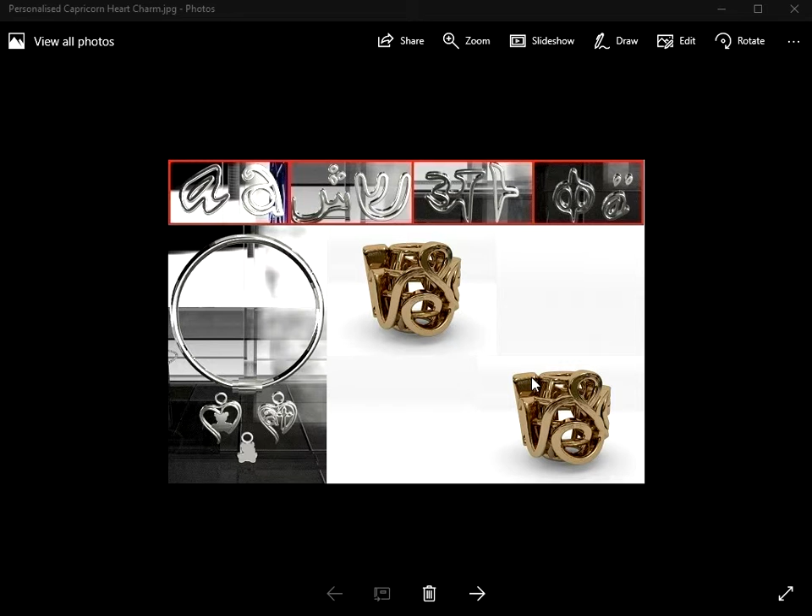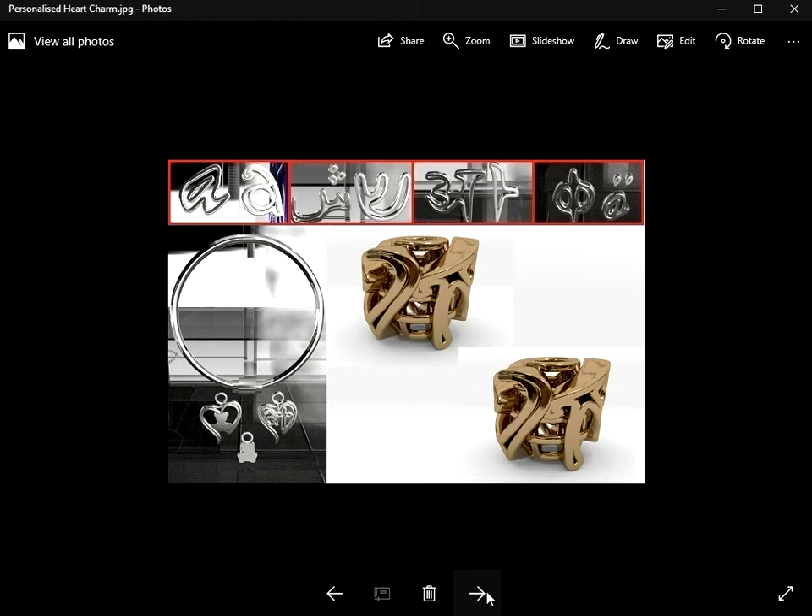Now there's lots of other objects you could put on. You could put on this Christian cross, for example, a Greek pattern. You could just put hearts on it, or this Mayan symbol. Basically you can put anything onto the outside of your charm in a similar way as to what I'm going to show you.

So if we go to Fluid Designer for 3D printing, I'm going to use this 4mm charm object, which has been pre-built for you.

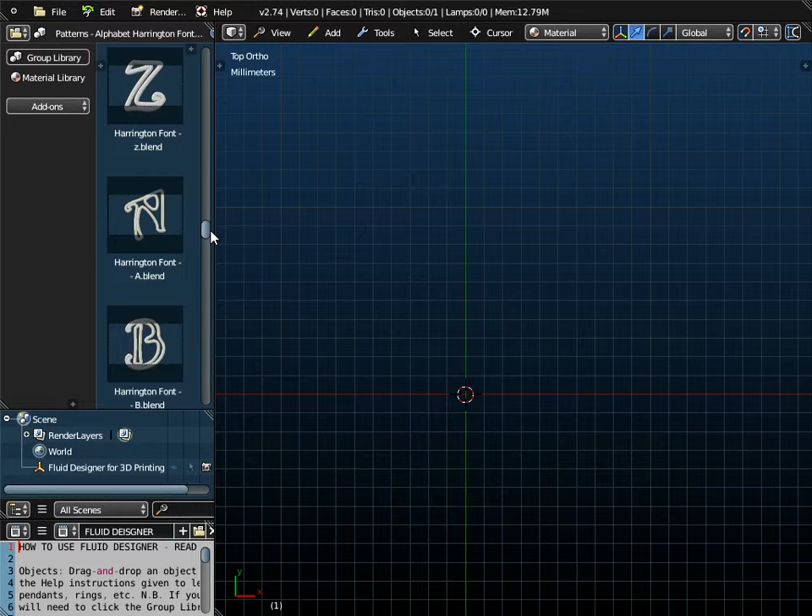And to that, I'm actually going to add... not Blackadder, sorry. I'm going to add a Harrington font, this letter A, onto the outside of the charm.

I'm also going to add a heart pattern. So if I go to hearts, I could add any one of these hearts to the outside of the charm, but I'm going to add this one here, 005.

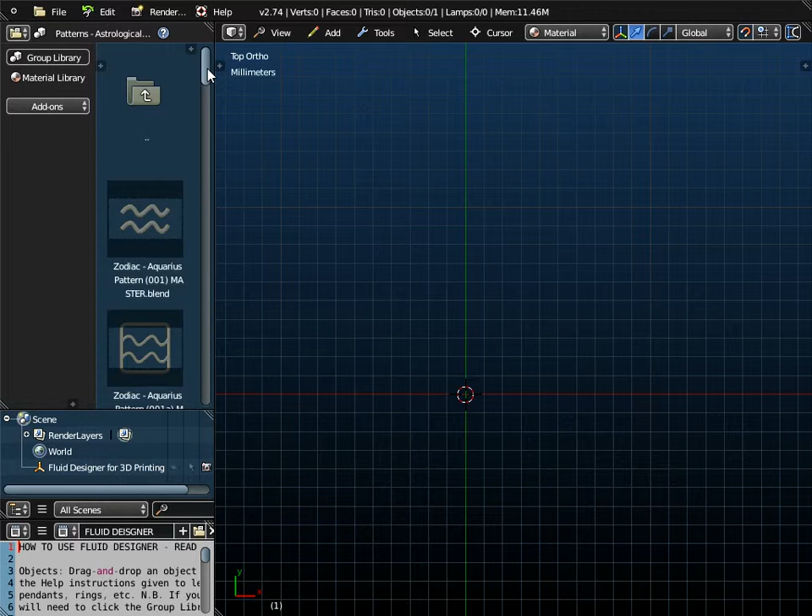And I'm also going to, in this case, add an astrological zodiac symbol, and I'm going to add the Capricorn one. So those are the objects I'm going to combine to place on my charm.

So if I go back to the charms folder, I'm going to use this 4mm charm here. If I just drag and drop that onto the workspace, and I'll switch on Screencast Keys, so any key presses I make should be displayed down here.

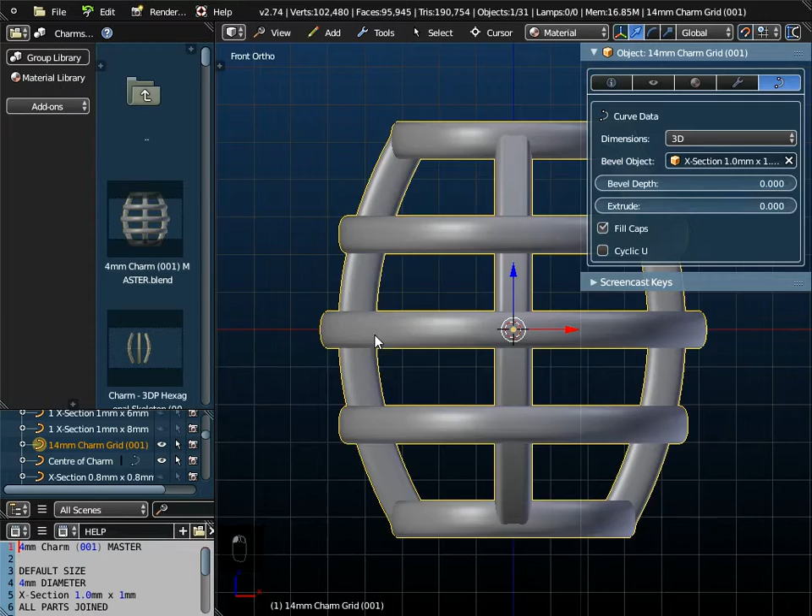Now this pre-built object, if I just remove the bevel object here, it's a curve or a combination of curves which have been joined together for you, and you can apply thickness to this.

So let's see, the default cross section was 1 by 1, a square sort of cross section, so that's 1mm by 1mm there. And it's got a 4mm hole at the top for you.

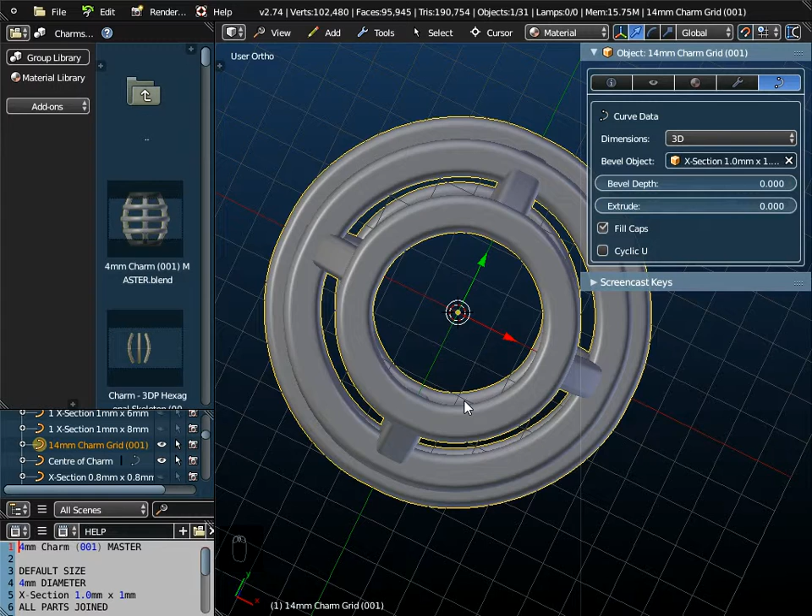And you can change the cross section to rounded. So I'm going to change it to a cross section diameter of 1. That gives it a rounded cross section of 1mm.

So let's say this is a parametric smart object. If you go view from the front, so that's what it's going to look like, and we can see the length of this. It's only a centimetre long.

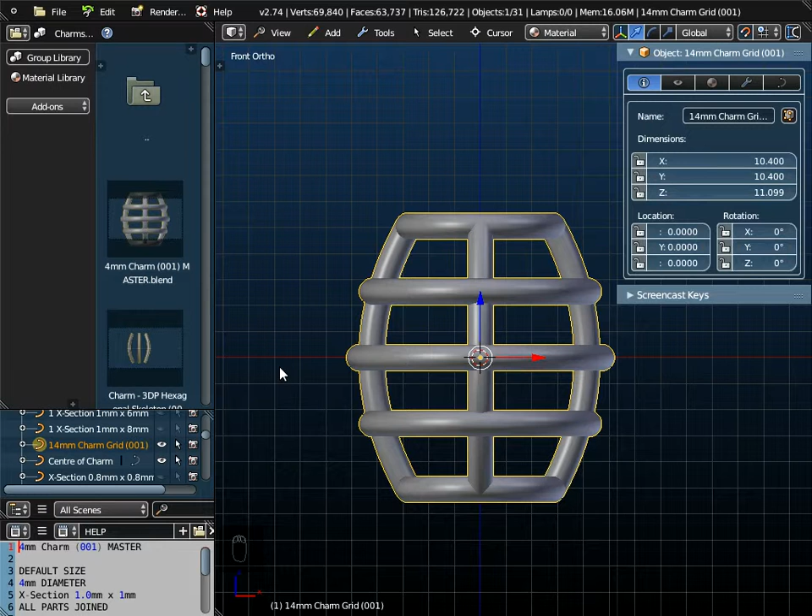But something that we are going to do is to place objects around the outside of this. Now, in order to place objects around the outside, we need somewhere to locate them. So there is this object over here, the centre of the charm. That's an important object to use here.

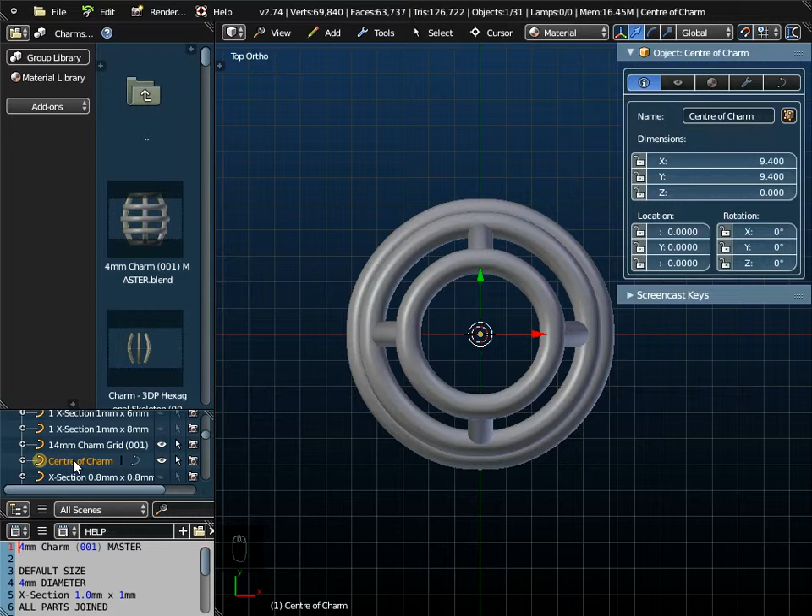So if I go to view and top view, now you can't see what centre of charm is at the moment, but if I press the tab key, essentially that is the outline of a circle. I know it looks like a square, but that's just because we're in edit mode.

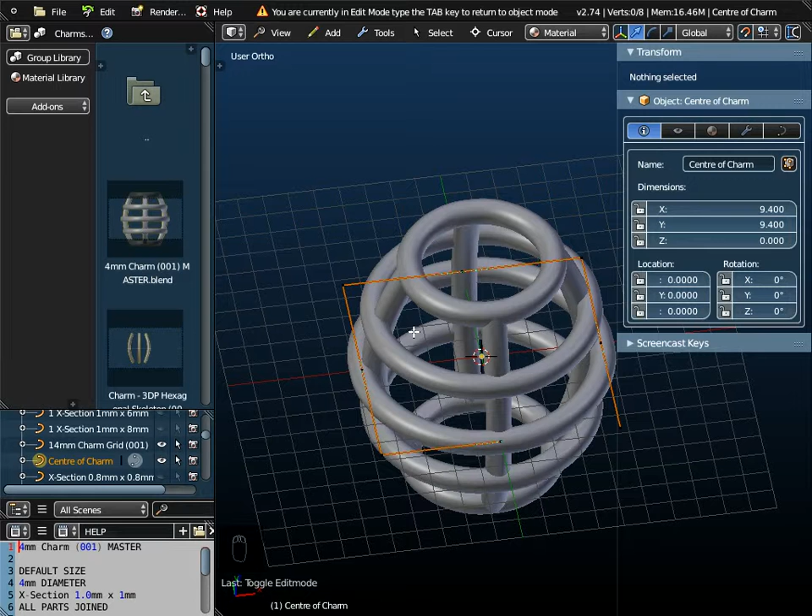That object is in fact a NURB circle, and we're going to wrap our Capricorn pattern and heart pattern and Harrington font around this object. As you can see, it's just located in the center of the charm outer section there, so there'll be some overlap. So we're going to use that object.

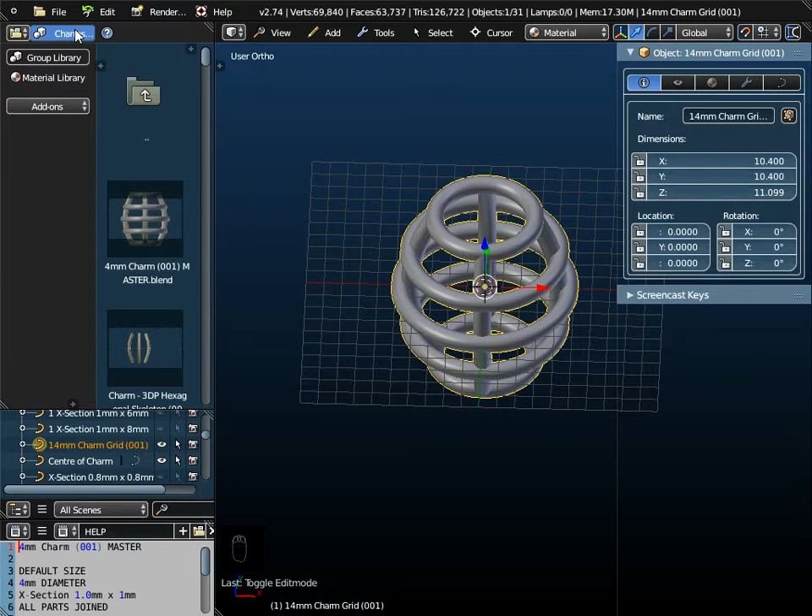Let's start adding objects to this now. The first thing I'm going to do is add a heart, I think. So if I go back to the heart folder, I'm going to add this heart 005.

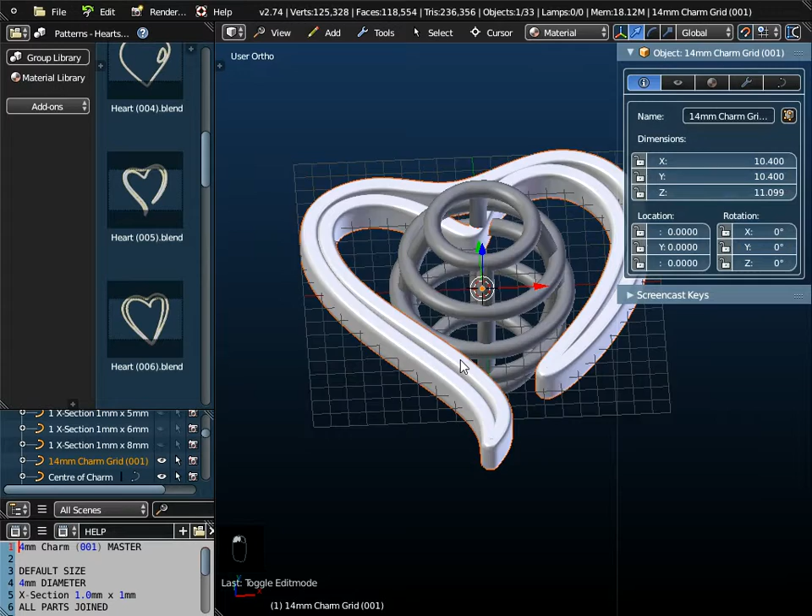And the way we do it is we go to File and Append. Just go up through the menu system until you get to the Groups folder, and look for the hearts pattern folder, and I want heart 005, and I append that from the library. Now make sure you click on it to select it.

Now clearly that's not in the right orientation at the moment, so if I press R on the keyboard, X on the keyboard to limit the rotation to the X axis, and if I type 90 degrees, that will rotate it to the right orientation.

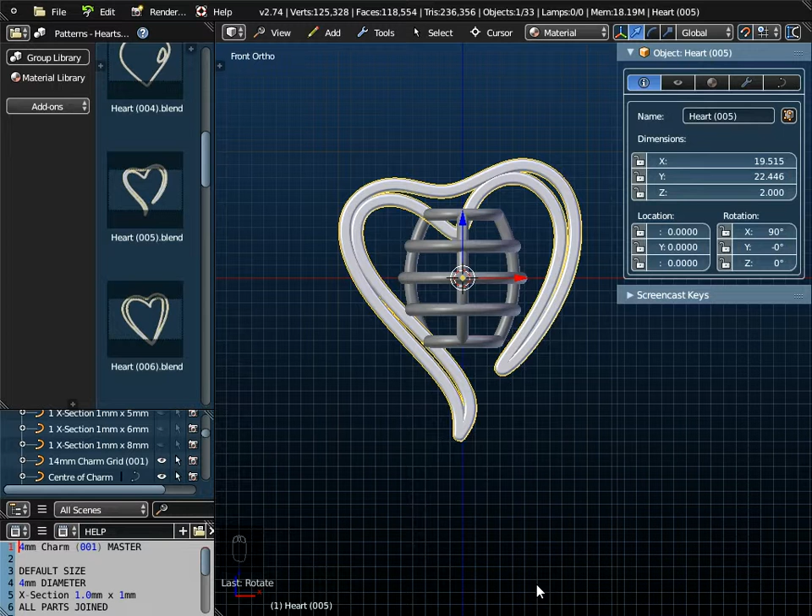And if I view that from the front now, I need to scale this down, so it's S on the keyboard for scale, and I'll leave it at that size. Now whenever you're scaling in Blender, you must always immediately do Control A and apply the scale, and notice the thickness is reapplied as you do that.

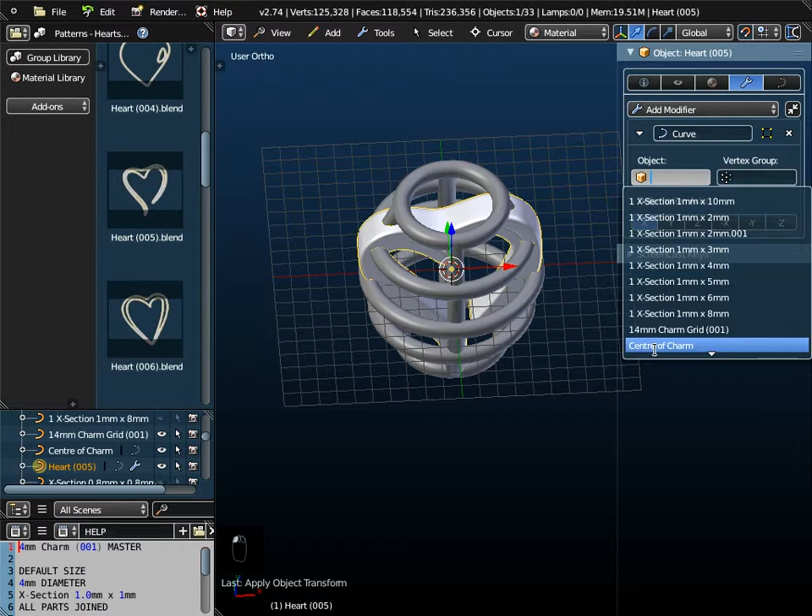Now what we want to do is attach this or locate it on the outside of this charm, and we do that using a modifier, curving this around the center of charm object. So we add a curve modifier, set the object to center of charm, and that will locate the heart on the outside of it, but overlapping, because we need a solid object.

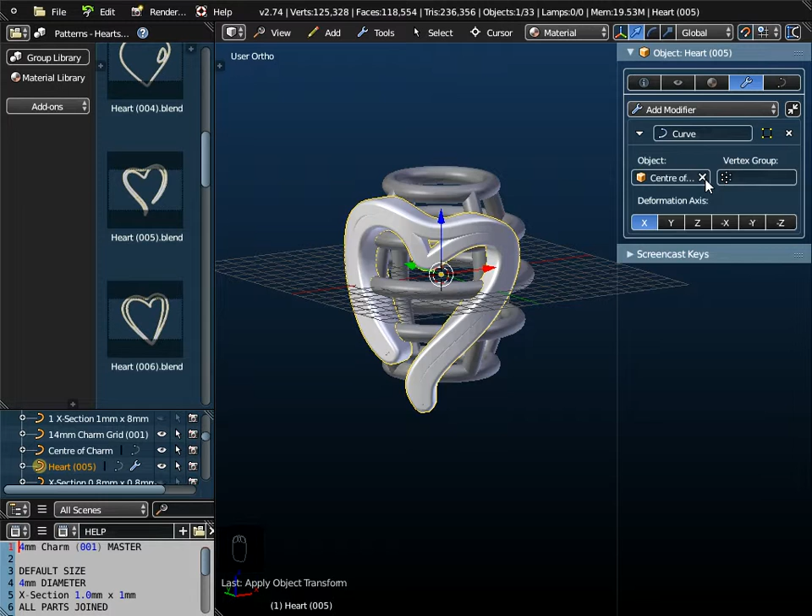Now, one thing that's just happened, if I remove that, is it's actually flipped the heart the wrong way round compared to the original. That's not important for the heart shape, but it will be important for the other objects we're going to add. So I'll leave that heart as it is, and now I'm going to append a Harrington font.

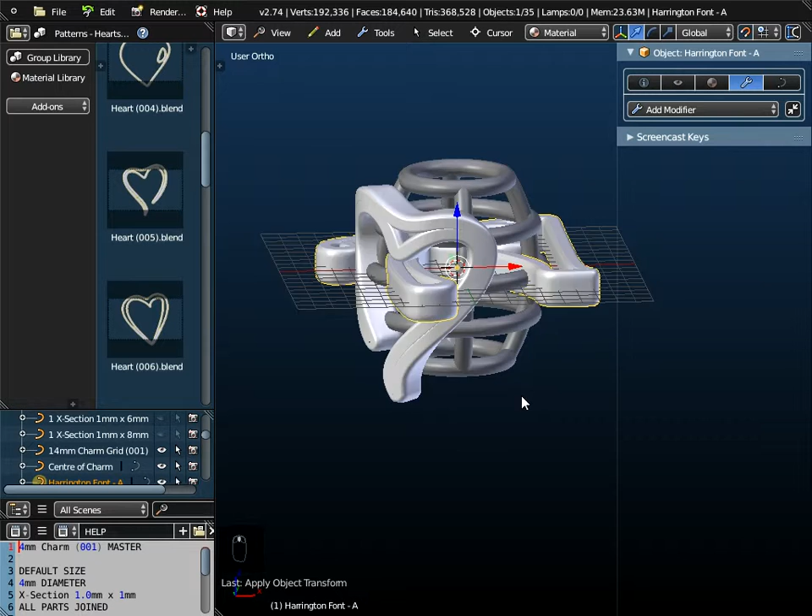Go up through the menu system, go to Alphabets, Harrington font. I want capital letter A, the object, so I just append that from the library. Again, this is the wrong orientation, so we do R on the keyboard, X on the keyboard, and 90 degrees, that will rotate it.

If we go to view and front, and I do S for scale, I can scale this down. Always remember to do Control A and apply the scale, otherwise you won't know what the thickness is.

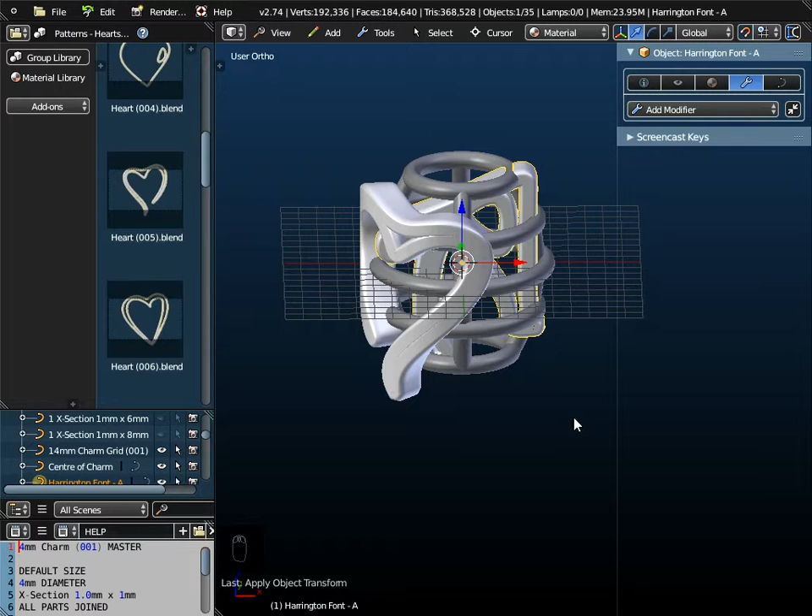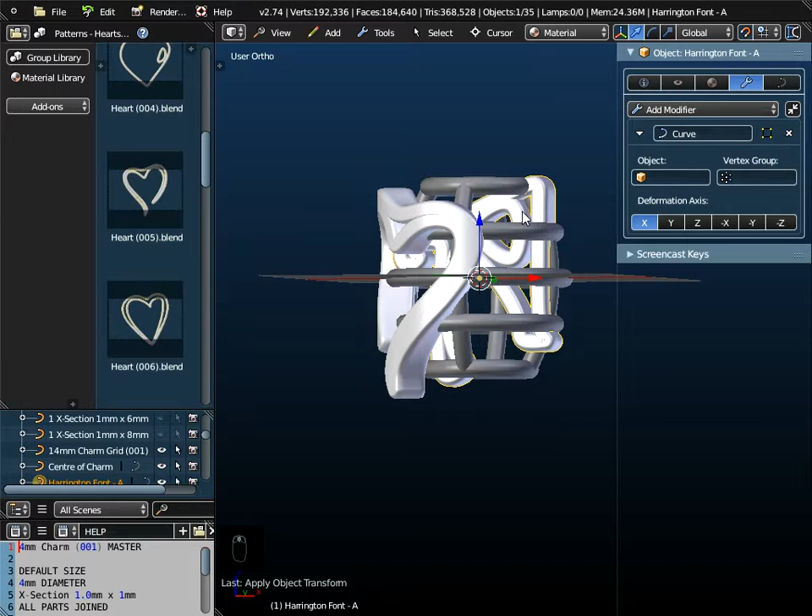Now if I simply use a curve modifier again and set it to center of charm, one of the things it does is flip my letter A the wrong way round from what it was originally. If you look there, you can see the O in the A is on the right hand side. If I do center of charm, it's flipped it onto the left hand side.

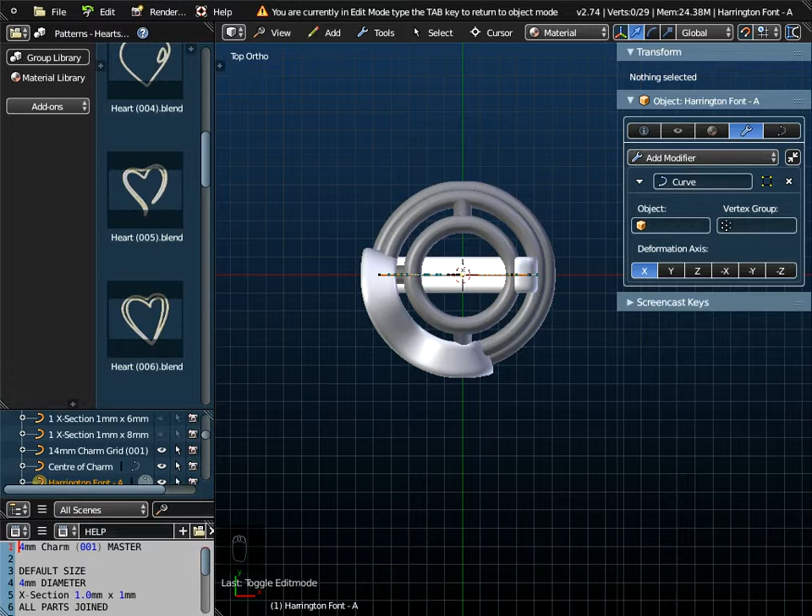Now you might be happy with that with the A, but you wouldn't want that with other letters, so how do we fix that? Well, if we go to view and top view, with the A highlighted, we go into edit mode, and we need to highlight all of this object, which we can do by pressing A on the keyboard. That will select all the control points.

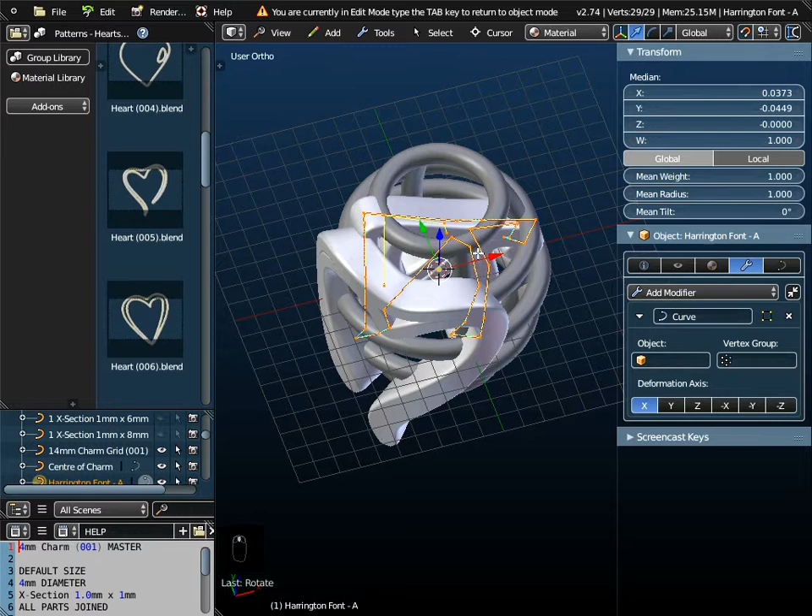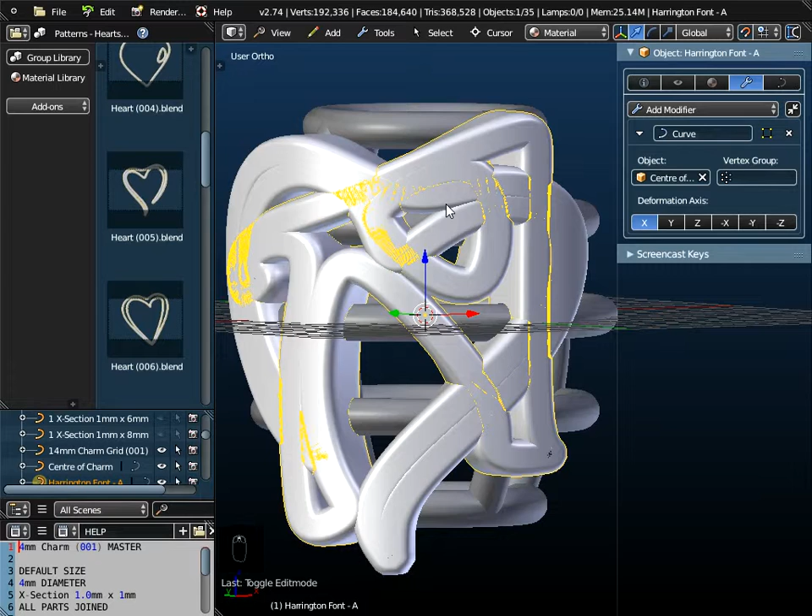What I want to do now - this is the Z axis coming upwards - if I go back to top view again and do rotate Z 180 degrees, I've just flipped that A around. If I show you over here, that's what I've done, flipped it completely around. And if I come out of edit mode now, go back to modifiers and set my curve modifier to center of the charm, you can see the A is now the same orientation as it was originally in the Harrington fonts folder.

So if you just go to Harrington fonts, here's the letter A. You can see that the O part of the A there is on the right, which is what we want. I'd say that's quite an important point to make for certain objects.

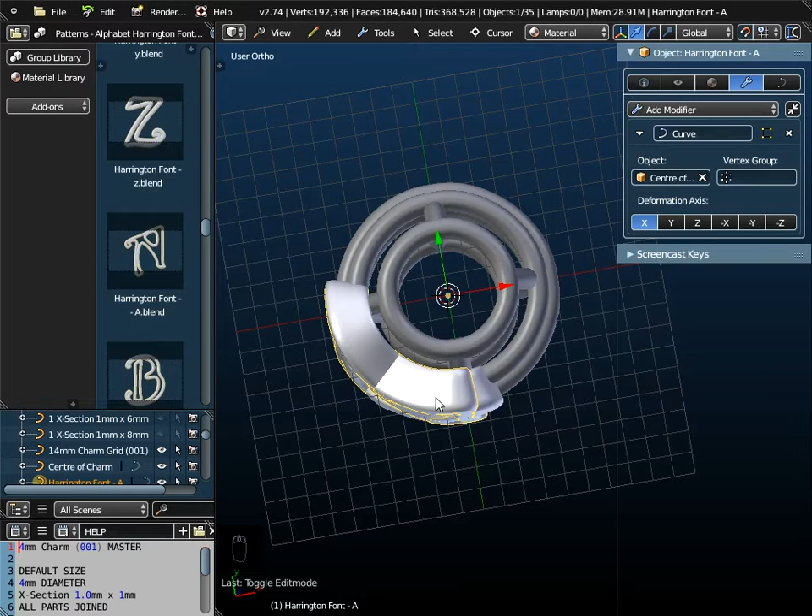Now, as you can see, it's right on top of the heart shape at the moment, so I need to move it around. The way I move it around is I go into edit mode, and I either need to move it to the right or the left. I suspect I've got to move it to the left, so I've just dragged the red arrow there, and you can see that's moved it away from the heart.

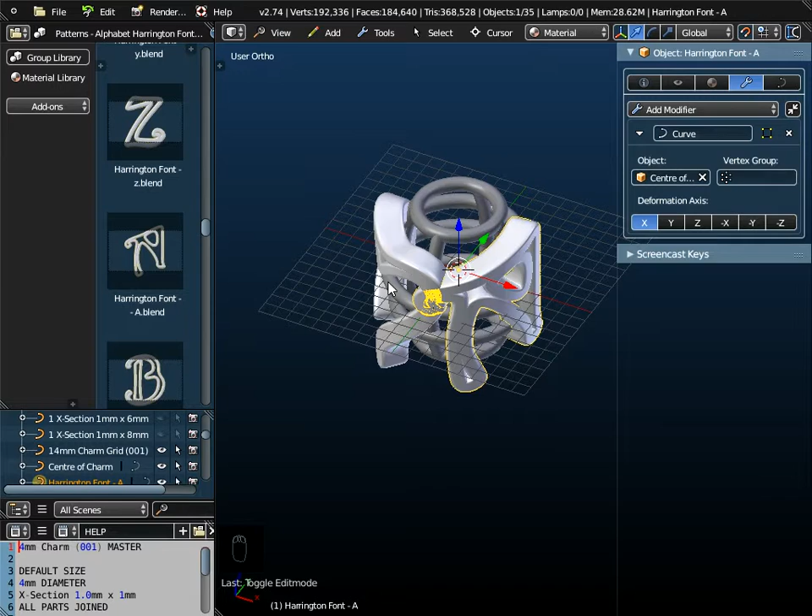Now I've got some overlap there, but I'm going to leave that at the moment - I might come back to that. It just depends how much space my final object, my Capricorn zodiac pattern, takes up. So the next thing I'm going to do is append that - I'll just show you where it is again.

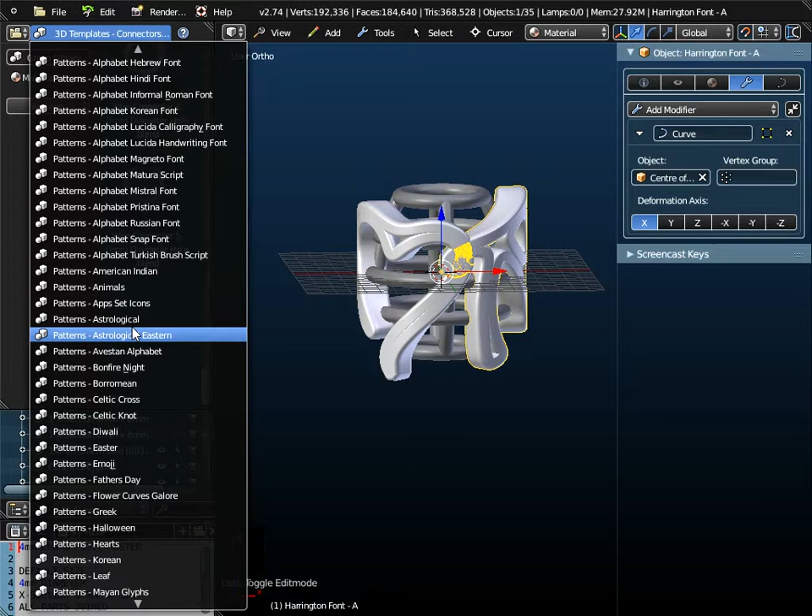So it's an astrological symbol, and we're going to append this Capricorn pattern. Now there are two of them, one with a box around it, one without. I'm going to append this one here, so it's Zodiac Capricorn pattern 001. So go to File and Append.

Just go up through the menu system until you get to the Groups folder. We're looking for astrological patterns. I want Capricorn pattern 001, not 001A. And I want the object, and I just append that from the library. So there's my Capricorn pattern.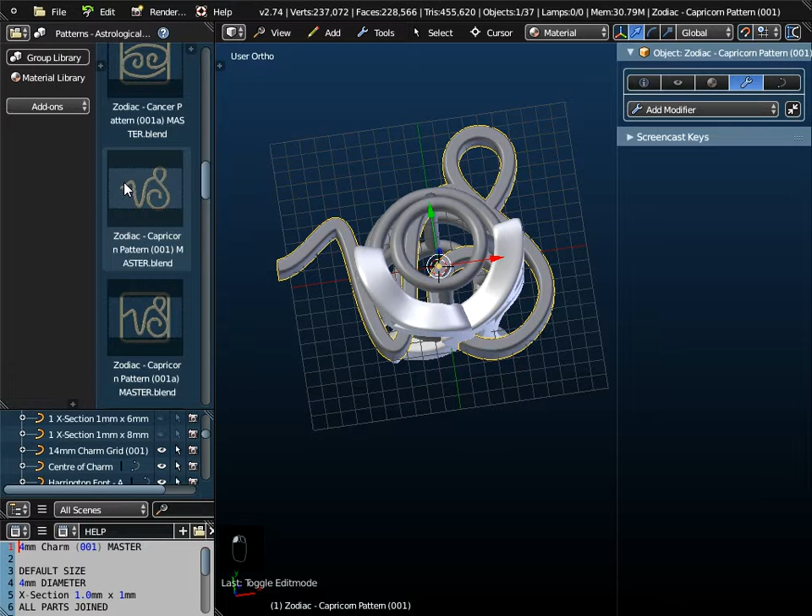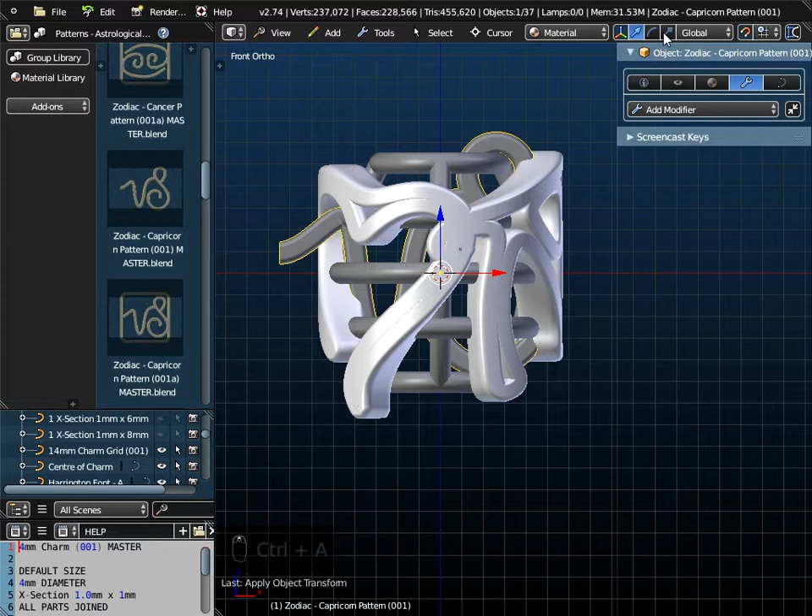Now the orientation of this is really important. So first of all, press R on the keyboard, X and 90 to orient it like that. Let's just go to view and front view again, and we scale it down, and remember to do Control A and apply the scale. If I switch off the snap, I can drag that down a little bit, and then switch the snap back on.

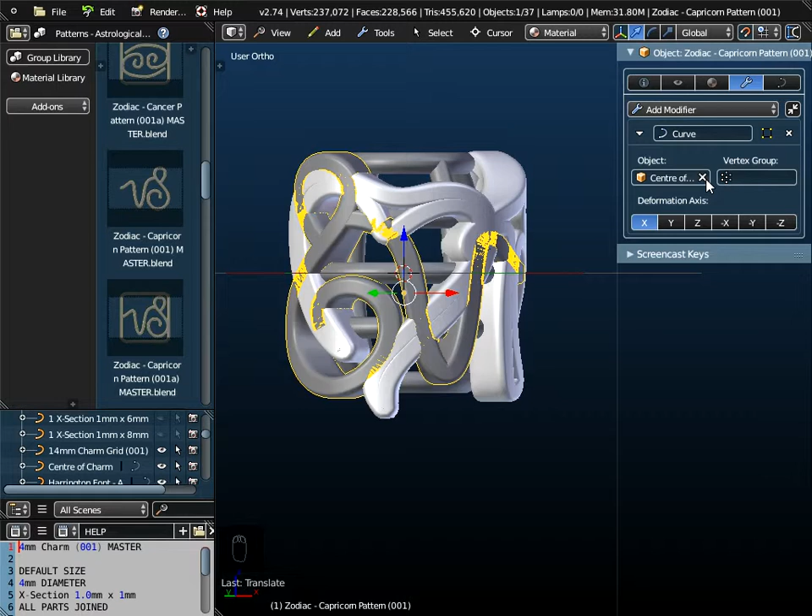Now remember that this is the orientation of the Capricorn pattern, so if I just go to Curve Modifier and wrap it around the center of the charm, this is now the wrong way round. The kind of V section should be on the left, but here it's on the right.

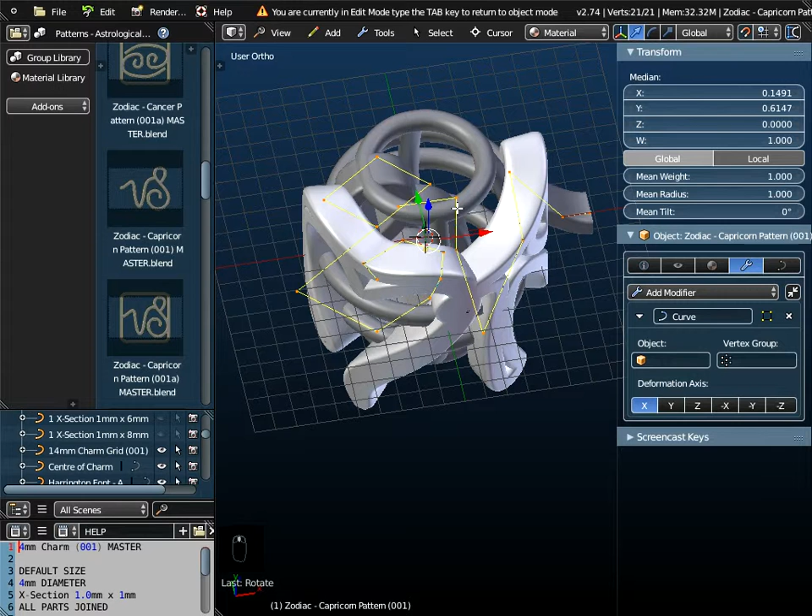So what you must always do when you use this curve modifier like this is go to top view, go into edit mode with the tab key, press A to highlight all the control points, and rotate about the Z axis, R Z 180, and that flips it around the other way. Come out of edit mode, and then you can set the curve object to the center of the charm, and you can see the orientation is now correct.

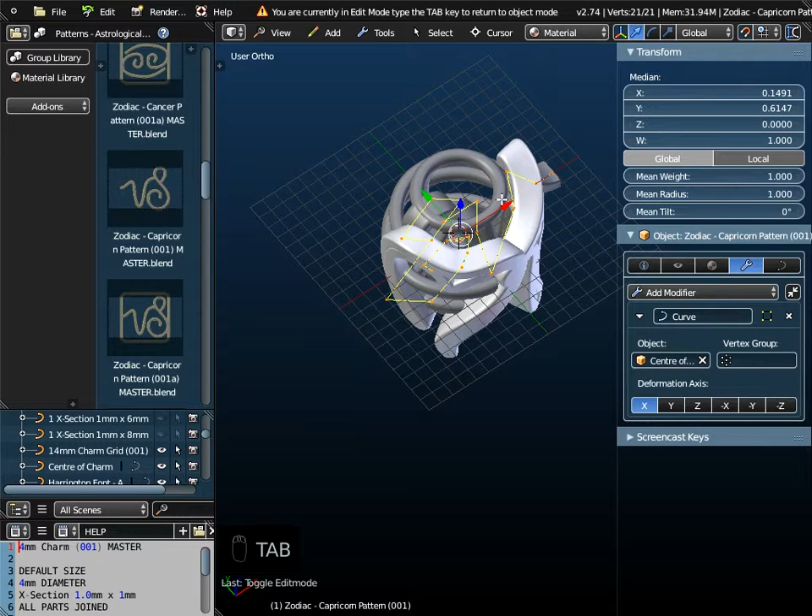So that's an important point. Now we want to move this around here, so we go into edit mode again, and I suspect I move this one to the right. If you're not sure which way, you just play around moving it to the left and the right, and you can see I've positioned it there.

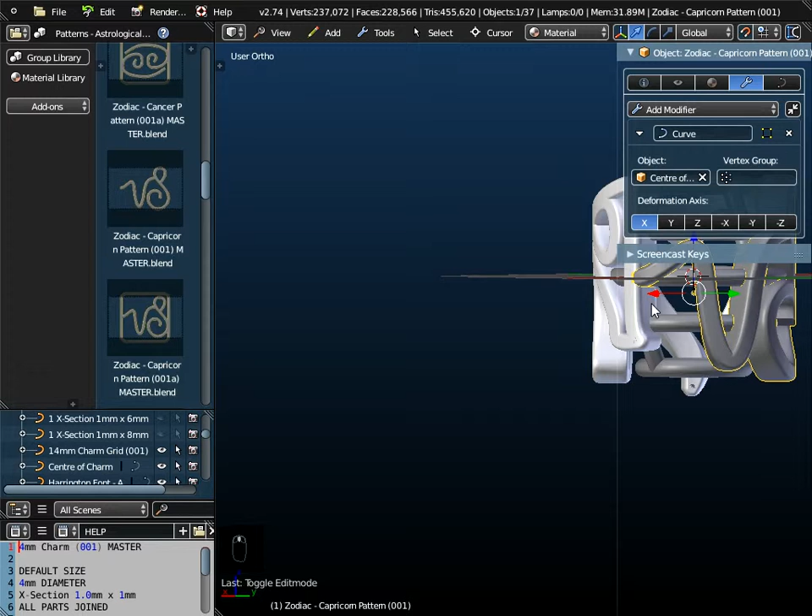Now I've probably moved that a little bit too far, so I'll pull it back a little bit. Okay, so I've got a gap there, but that's all right, I'll leave that gap. I've got my A there overlapping, yeah, that's okay. Now you can obviously adjust these and size them and position them as you want, but I'm quite happy with that.

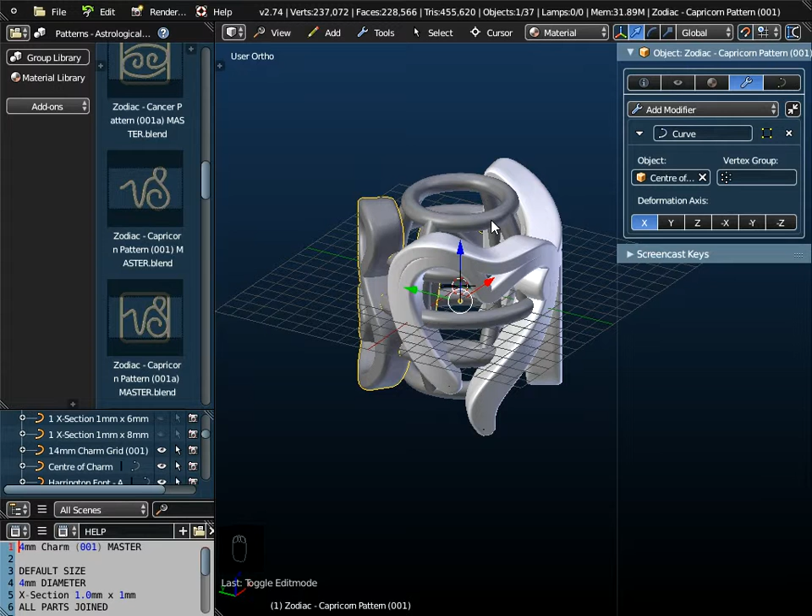Now, we can't simply join these objects together as curves, because if we do that, they will take on the properties of the last object we select. So if we highlight each of these three patterns first and join them together, that'll probably be okay, because they've all got the same thickness. But if I then join them to the charm in the middle, they'll all become 1 millimeter round, and I don't want that.

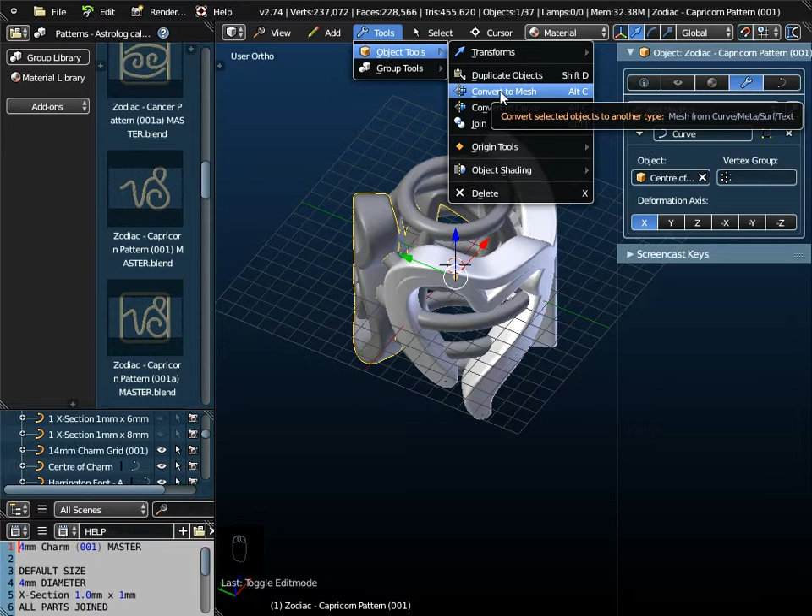So the way to join these objects, particularly when you've got modifiers as well, is to change them all into meshes first. So go to Tools, Object Tools, convert the Capricorn pattern to a mesh. Highlight the heart, go to Tools, Object Tools, convert that to a mesh. Highlight the Harrington font, convert that to a mesh. Highlight the charm in the middle, the original object, and convert that to a mesh.

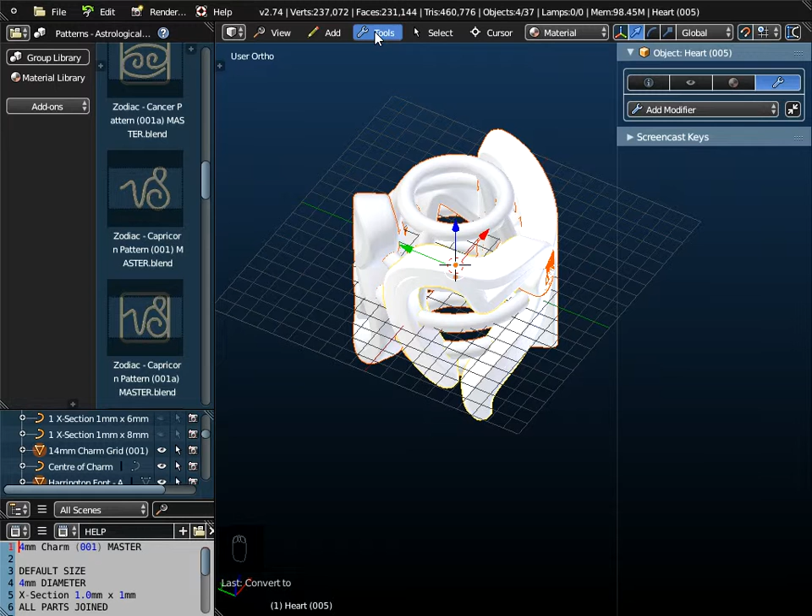Hold down the Shift key, highlight all four objects - I've clicked the Harrington font, the Capricorn and the heart - and then simply go to Tools, Object Tools and join. Now because these were parametric smart objects to start off with, that will be okay.

So what you need to do now is export this, and I export it generally as a Wavefront object. I exported it to the desktop and saved it with the name Personalised Capricorn Heart Charm. I did this earlier.

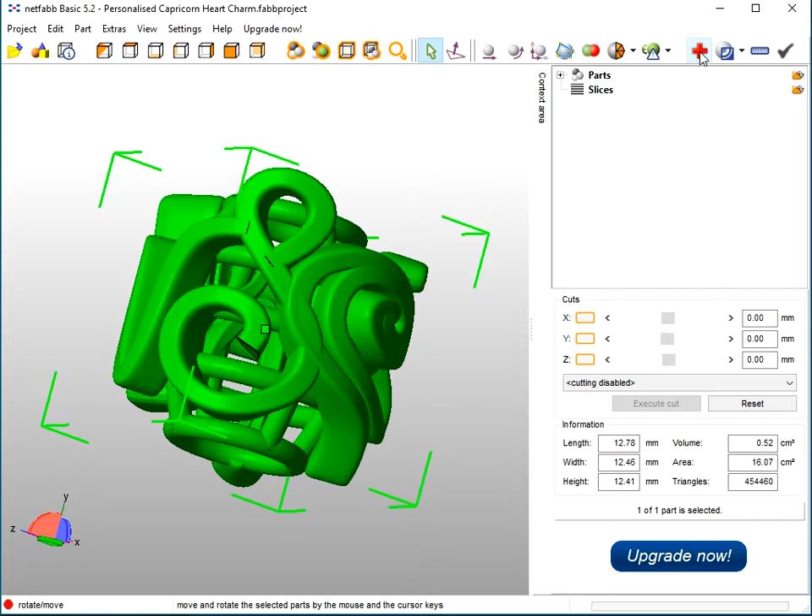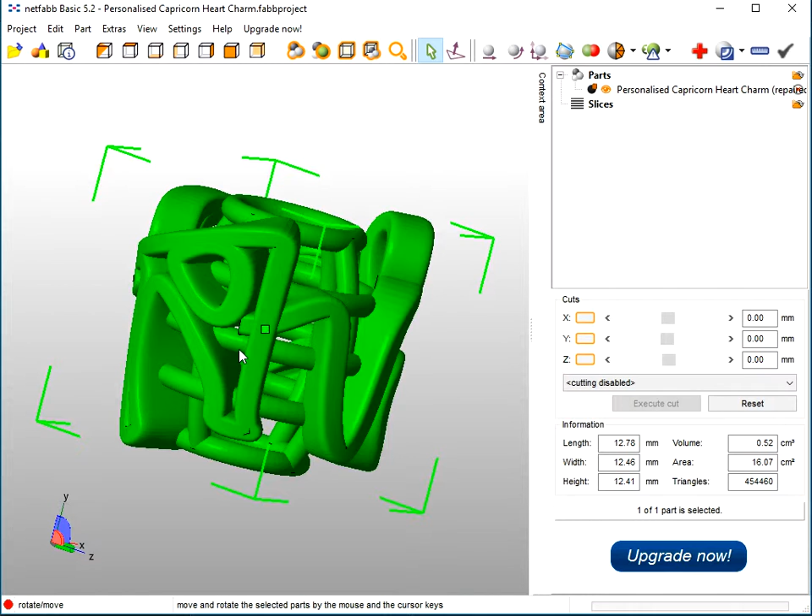And then what you must do is go to Netfabb Basic and open up the object there, run the repair procedure and automatic repair and execute it. You'll see that these values are all set to 0 by Netfabb, and apply the repair and remove the old part.

And so you can see there's the Capricorn pattern, there's my heart, there's my Harrington font letter A and my charm in the middle, and then you just go to Part, Export, Wavefront Object, and as you can see I saved it earlier as a Personalised Capricorn Heart Charm, which I then uploaded to Shapeways.

Okay, so literally any of these patterns that are available with Fluid Designer, you can add to your charm in a similar sort of way. So that's how you can do it.

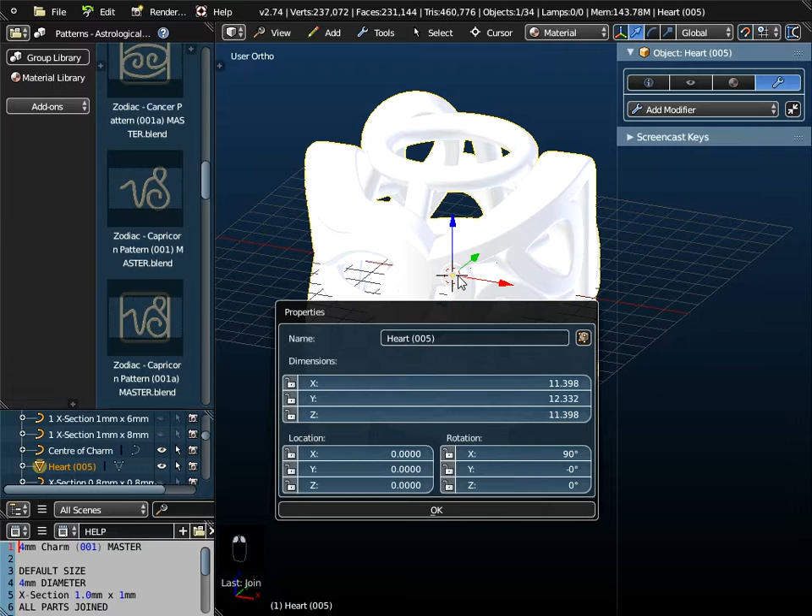Working in Fluid Designer for 3D printing, creating your own personalised charms. Thank you.